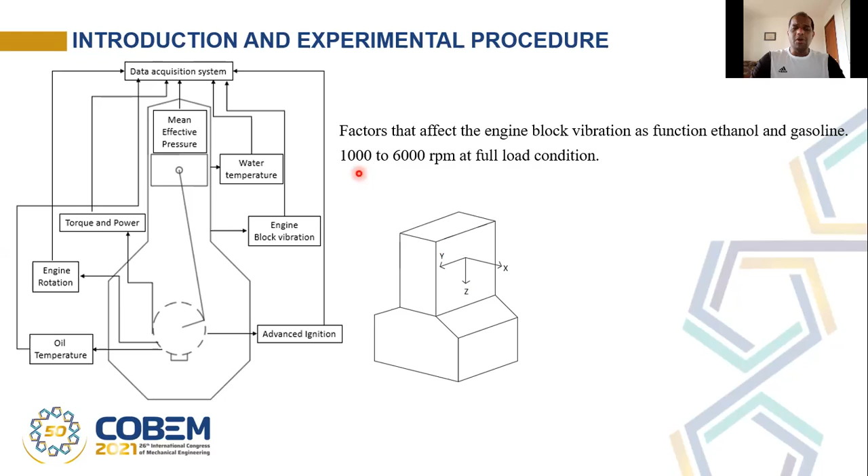This picture shows the vibration measured in the engine block. X is the transverse direction, Z is the vertical direction, and Y is the longitudinal direction. The experimental tests were performed from 1,000 to 6,000 engine rotation at full load conditions.

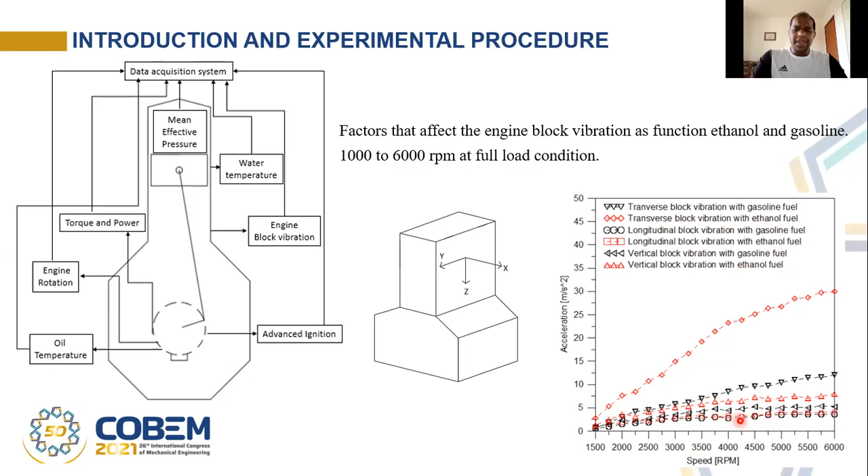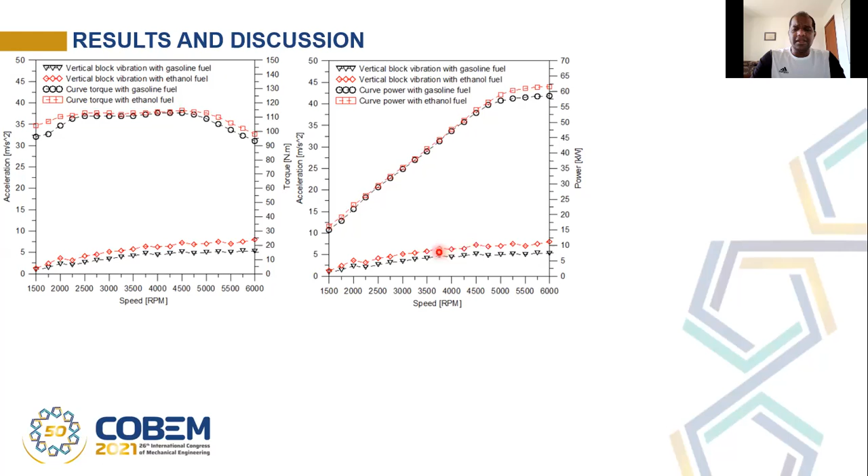This picture shows the relationship between vertical vibration in the engine and the power measured in the engine. The red line is the power in the ethanol engine, and the black line is the power in the gasoline engine. The power in the ethanol engine is higher than the power in the gasoline engine. It results in more intensity vibration in the ethanol engine compared to the gasoline engine.

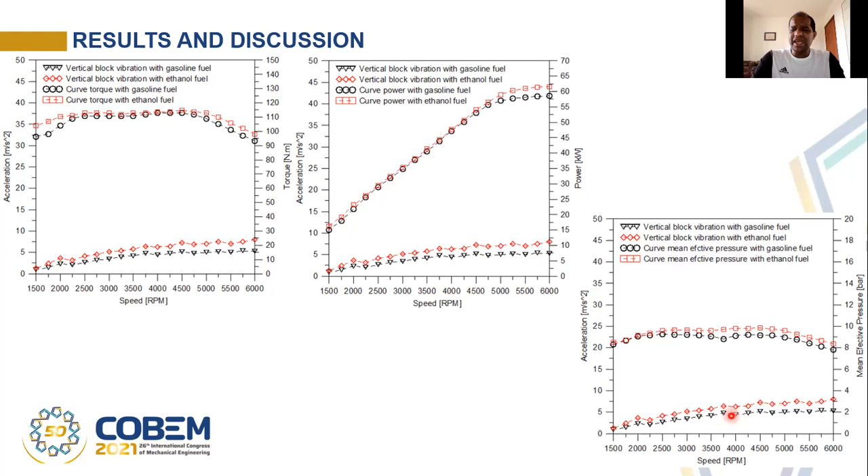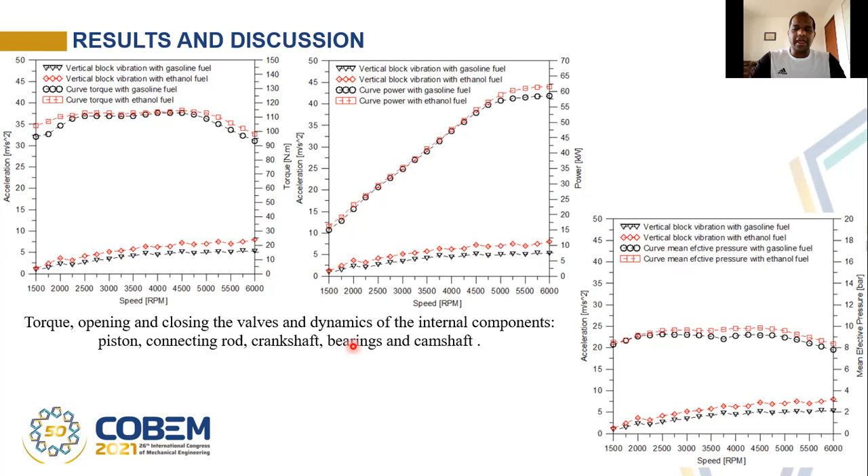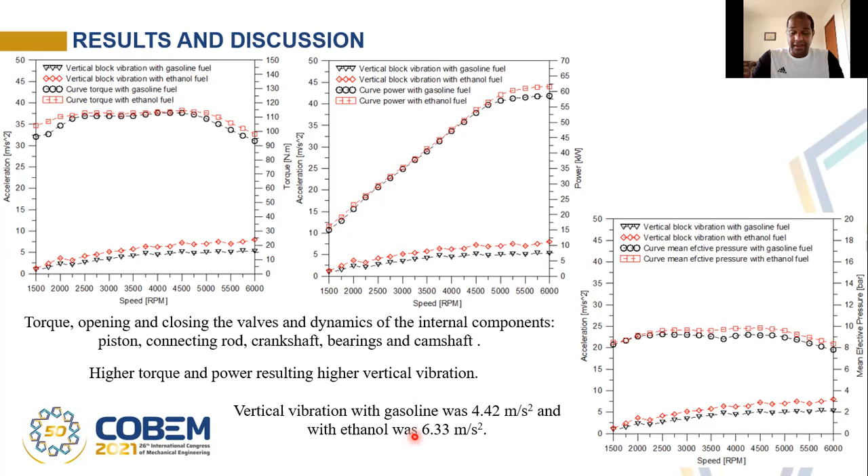The main parameters that influence the vertical vibration in the engine are the torque, the opening and closing of valves, and the dynamics of internal components. For example, piston, connecting rod, crankshaft, bearing, and camshaft. The high torque and power result in high vertical vibration. It results in higher intensity vibration in the ethanol engine compared to the gasoline engine, as we see in this picture. The average vertical vibration with gasoline was 4.42 meters per second squared, and with ethanol was 6.33 meters per second squared.

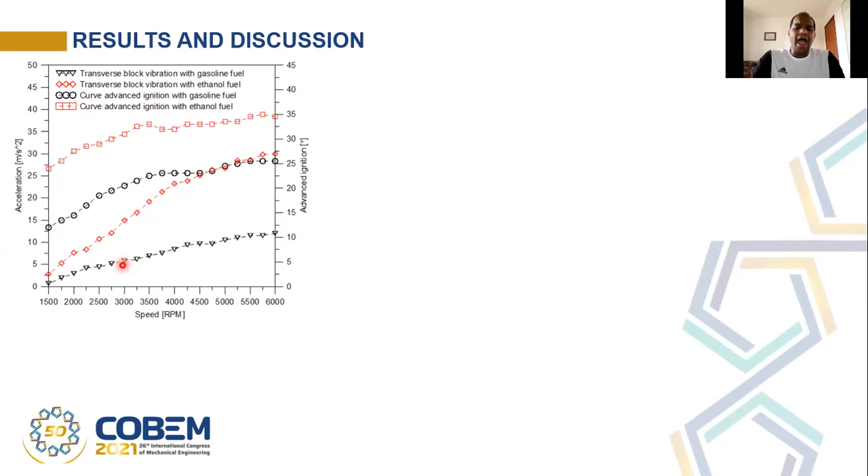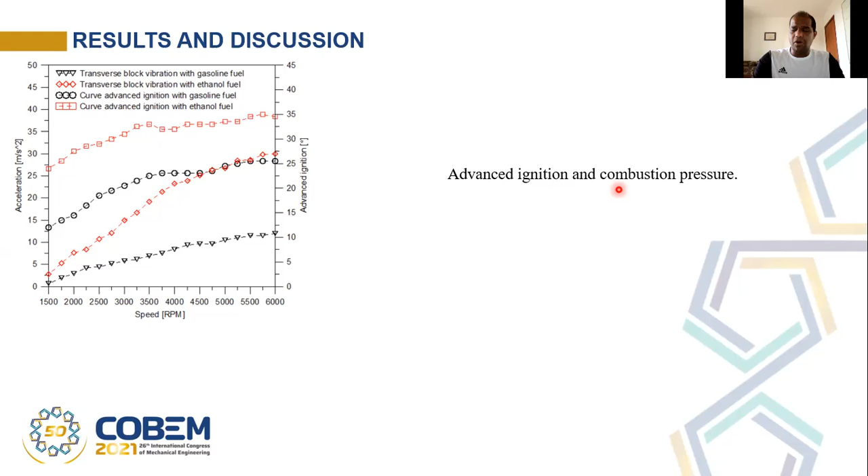The main factors that affect the transverse vibration in the engine were ignition advance and the combustion pressure in the cylinder. High combustion pressure and ignition advance result in high transverse vibration. The average transverse vibration with gasoline was 9.56 meters per second squared, and with ethanol was 16.38 meters per second squared.

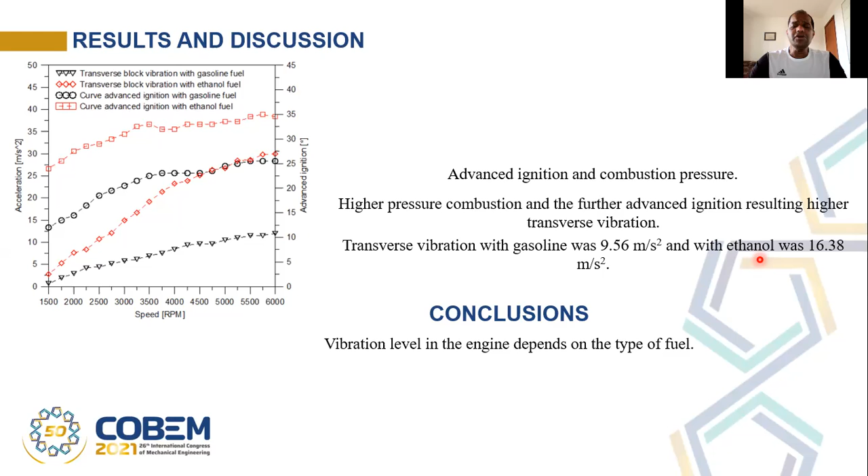The conclusion of the paper is that the vibration level in the engine depends on the type of fuel. The average vertical vibration was 31% higher in the engine run on ethanol, the transverse vibration was 56% higher in the engine run on ethanol, and the longitudinal vibration was 3% higher in the engine run on ethanol.